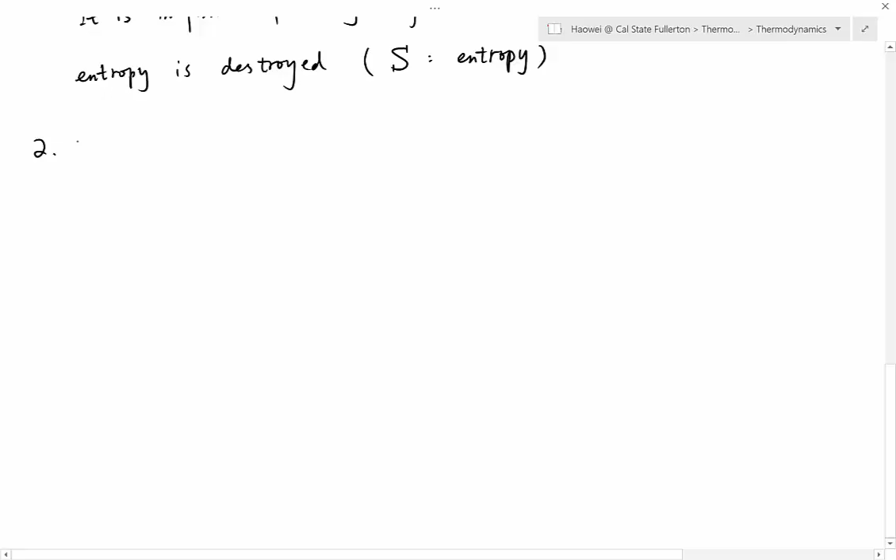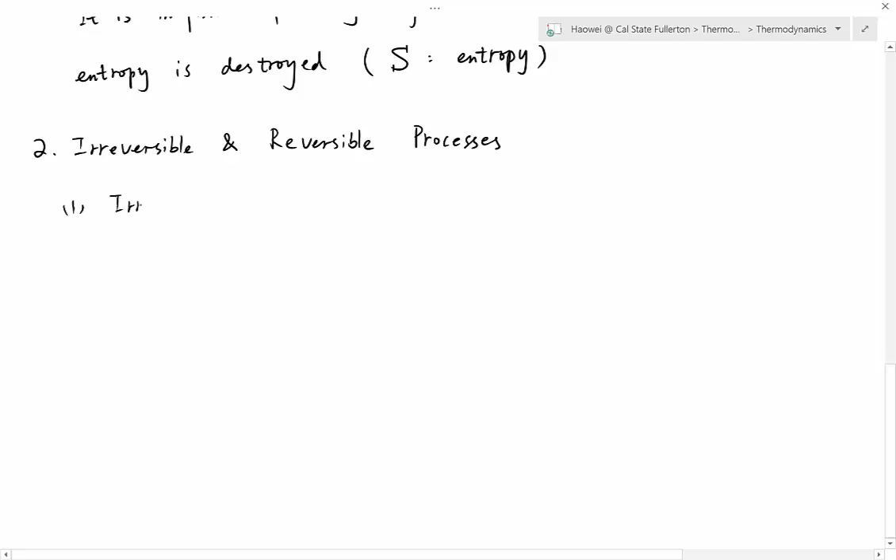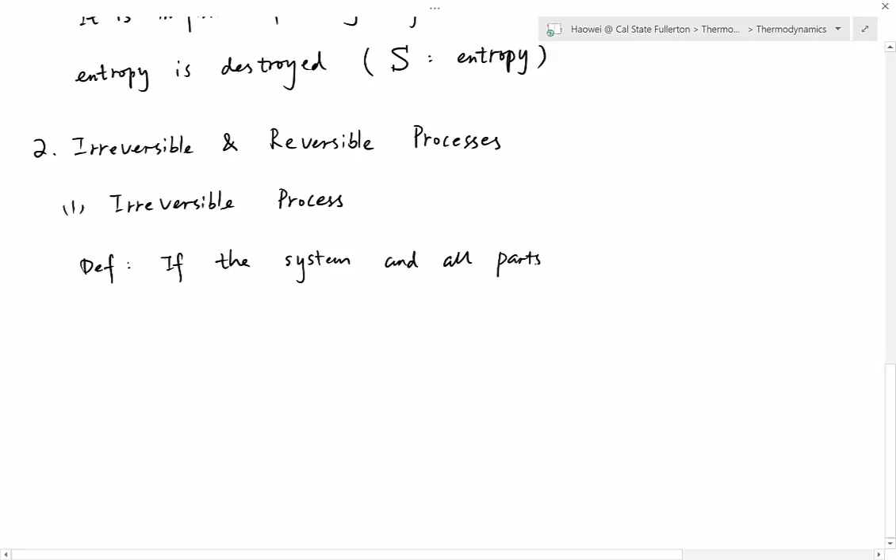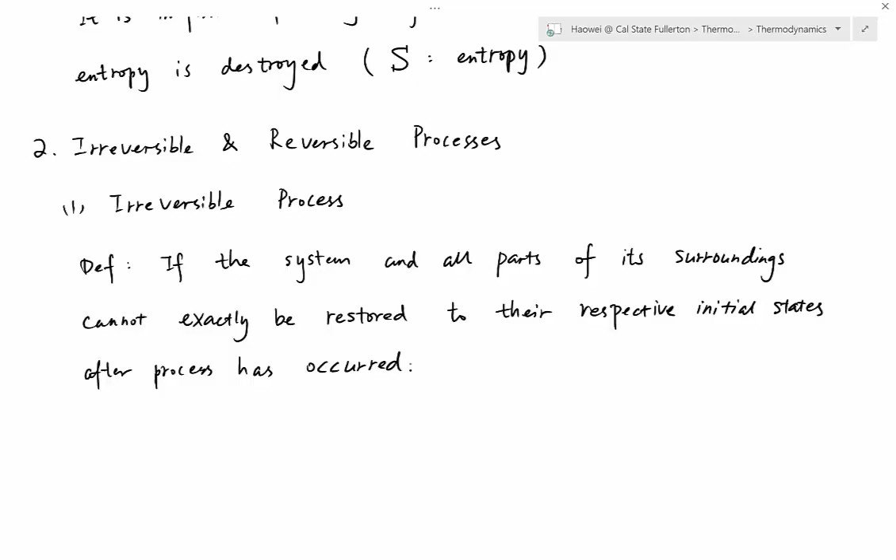Let's start from the irreversible processes. What is an irreversible process? The definition is: if the system and all parts of its surroundings cannot exactly be restored to their respective initial states after a process has occurred. If your system and the surroundings cannot go back to the initial state, then this process is called an irreversible process. We can think of a few examples.

First one, heat transfer. Heat transfer is irreversible. It's very straightforward. For example, you have a cup of hot coffee and you leave it on your desk. Over time, heat will be transferred from the hot coffee to the cold environment, and this process is not reversible. You cannot tell the air to give you back the heat and deliver it back to the hot coffee. So this process is not reversible. We call it an irreversible process.

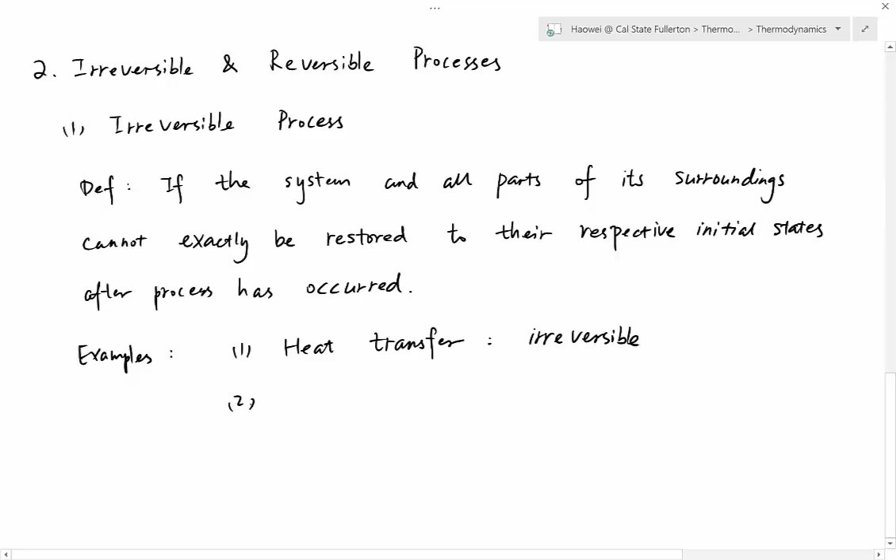The second example we can think of is friction. Friction is also irreversible. You can think of your car. You're driving on a freeway and then suddenly you have to brake. What is going to happen is the friction between the tire and the freeway will slow you down. So the kinetic energy becomes smaller and it will become heat in the tire. So your tire will become hot because of the friction, and now the energy is converted from kinetic energy to internal energy of the tire. This process is irreversible because you cannot ask a tire to cool down and give you back the energy so you can drive your car. It doesn't happen. So this process is also irreversible.

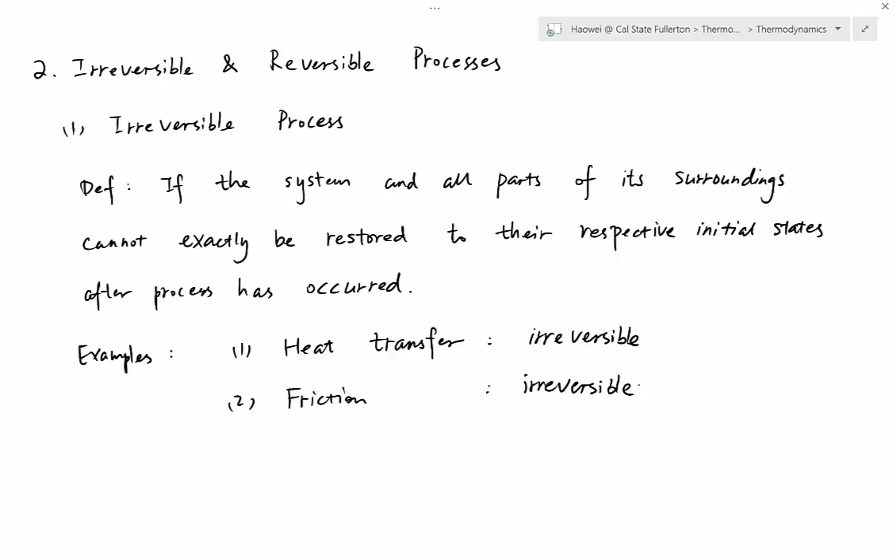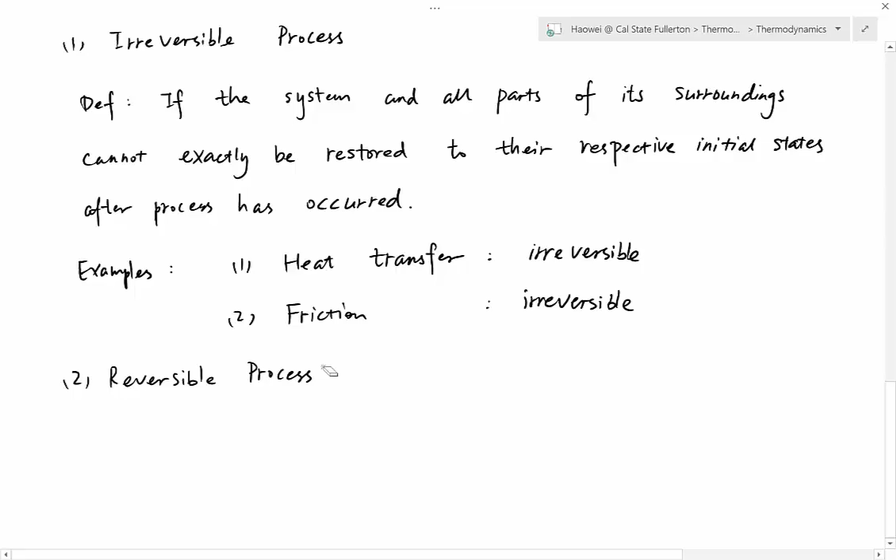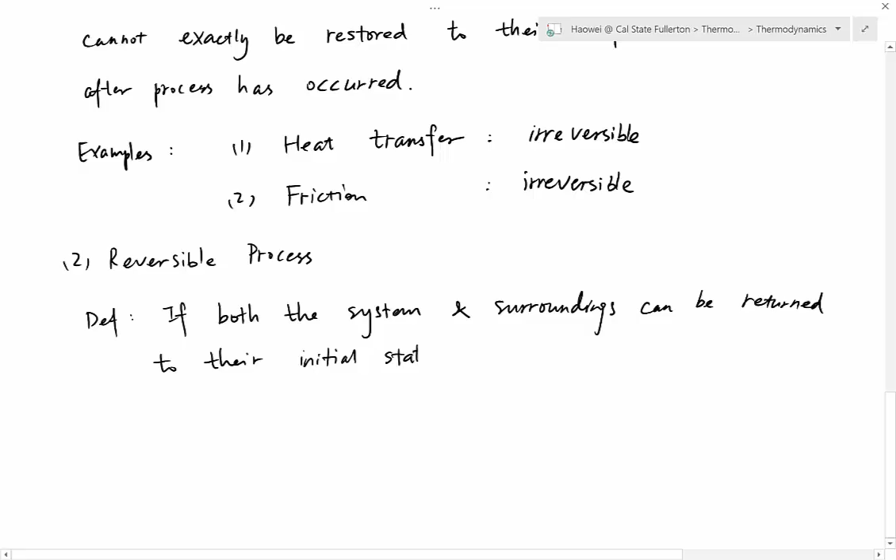Next, we talk about reversible processes. What is a reversible process? The definition is: if both the system and the surroundings can be returned to their initial states, then you can call this process reversible.

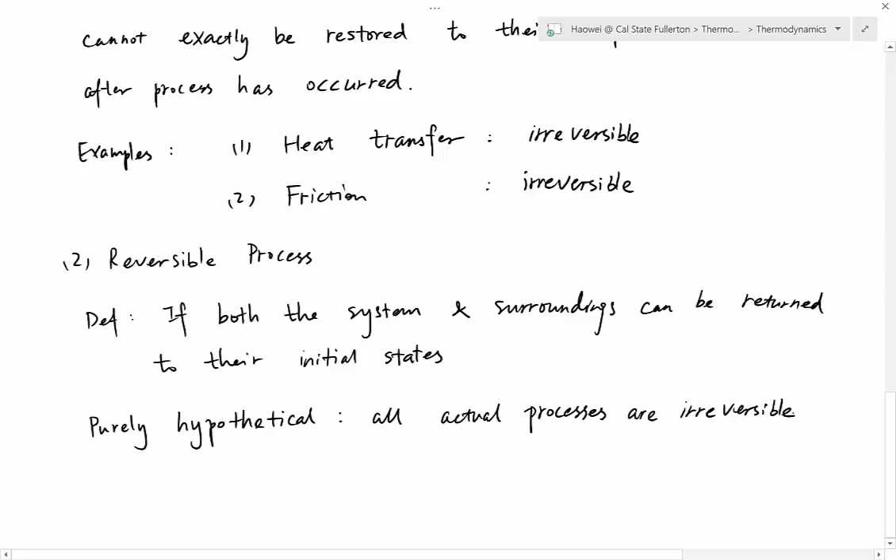It is purely hypothetical. All actual processes are irreversible. Everything in our life is irreversible, for example getting older. However, some of them can be approximately reversible.

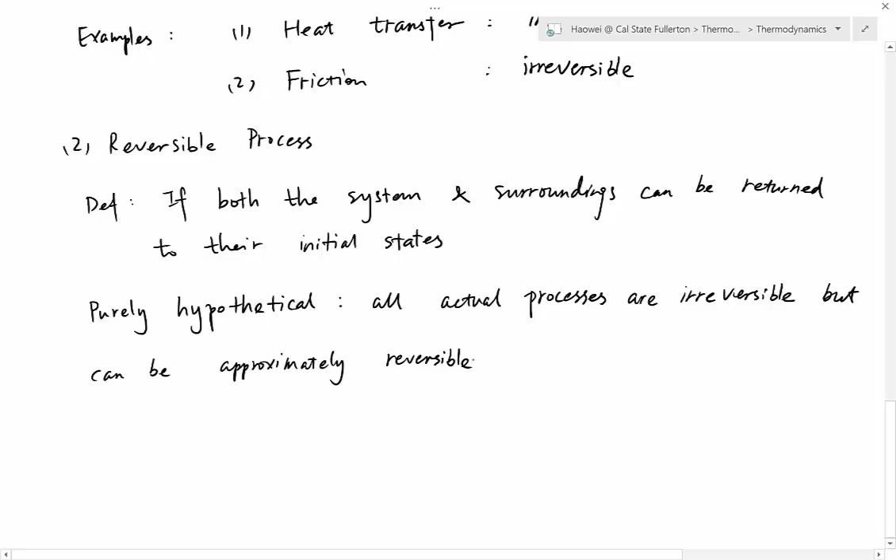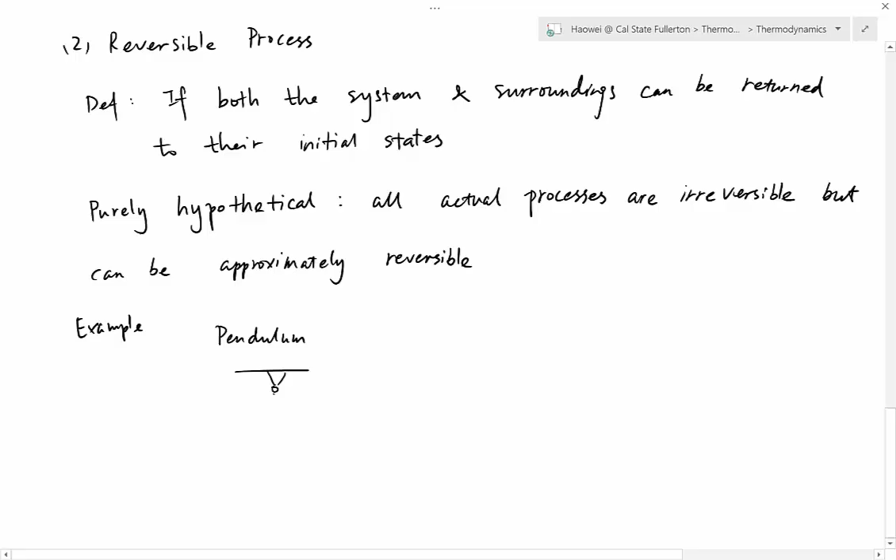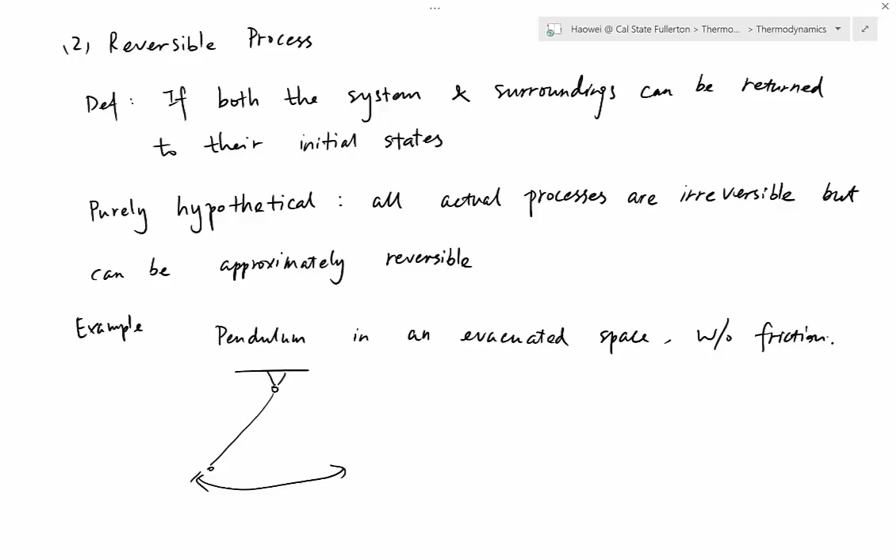Next, we can think of two examples for reversible processes. The first example is a pendulum going back and forth. If you put a pendulum in an evacuated space, meaning there's no air, so there's no friction, then the pendulum can go on forever and can always be returned to its initial state. This is an example of a reversible process, and we know in reality it will never happen because you will always have air, and air will cause friction. Friction is not reversible.

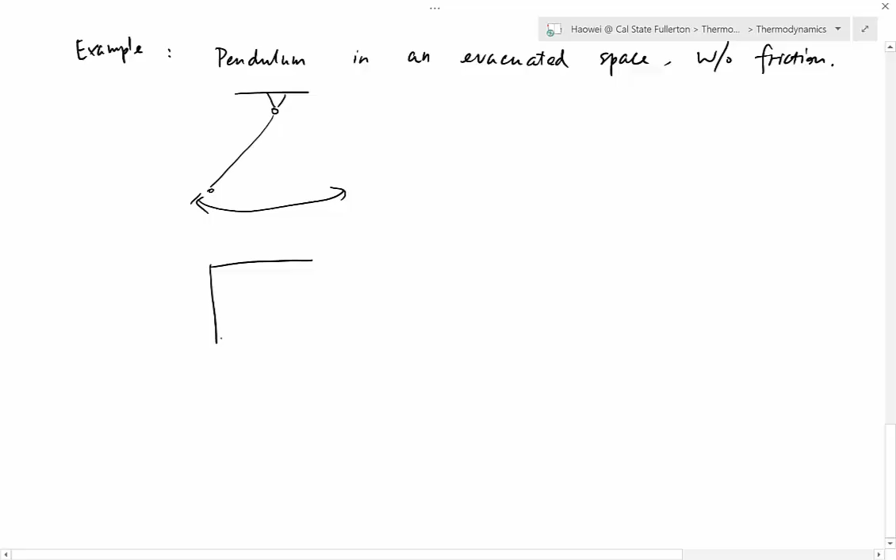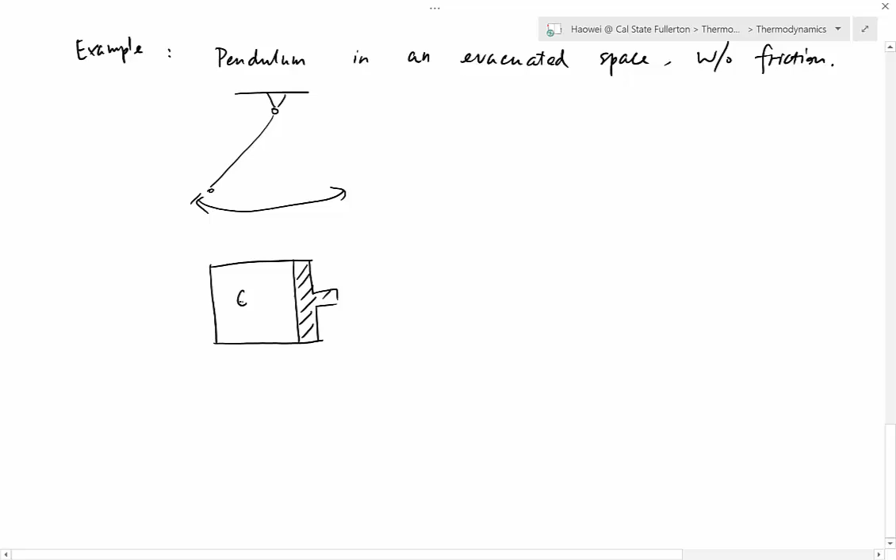Another example we can think of: you have a cylinder and a piston, like a simplified version of an engine. What's inside is the gas, what is outside is the atmosphere. If we slowly increase the pressure of the atmosphere, then the piston will be pushed to the left slowly. Then we decrease the pressure of the atmosphere again slowly, so the piston will be pushed to the right slowly, and it will be restored to the initial state.

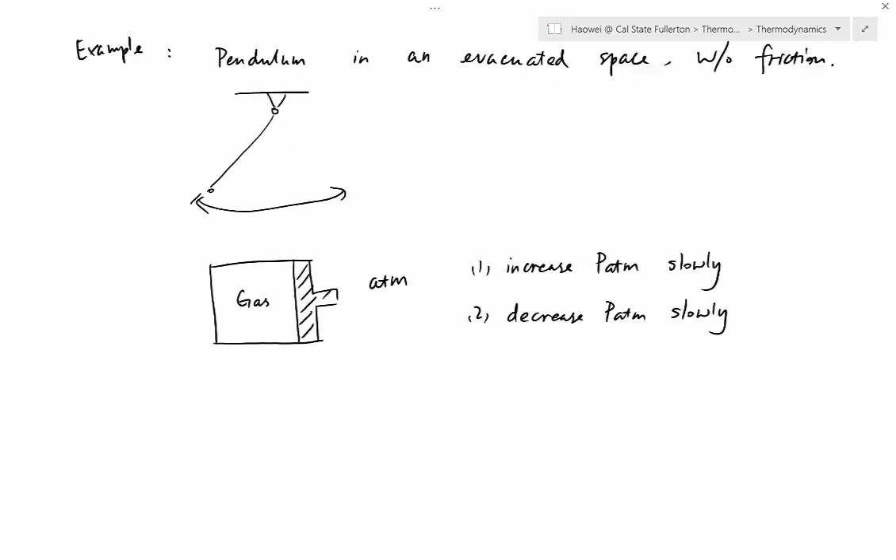Those are the two examples for reversible processes, and keep that in mind: it is purely hypothetical, but some of them can be approximately considered reversible. So now we go to the approximation.

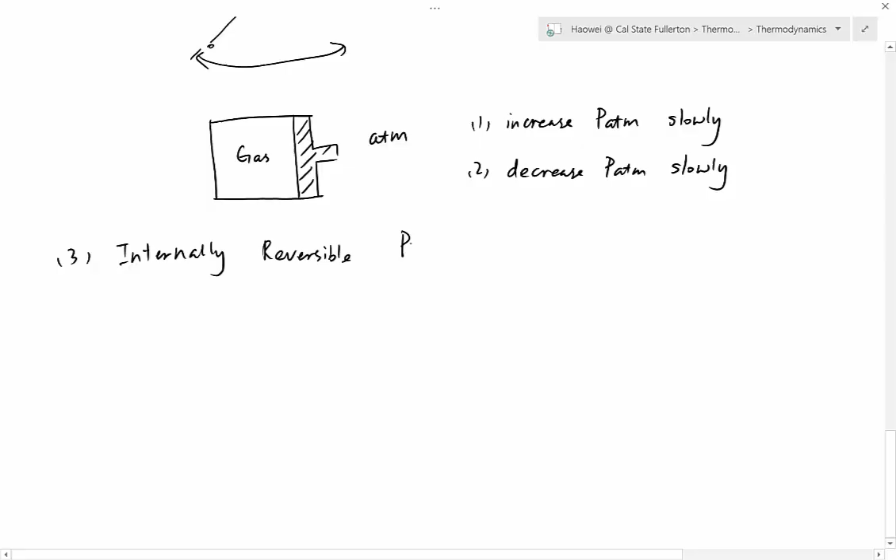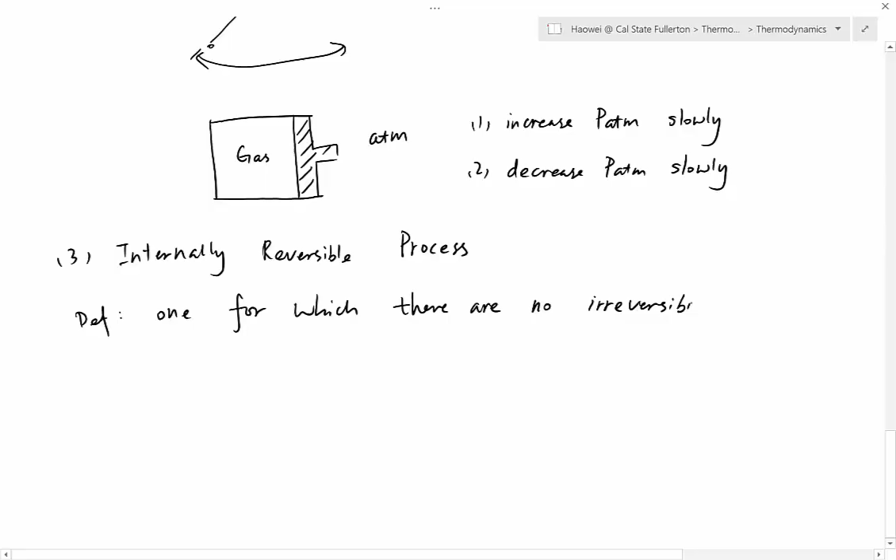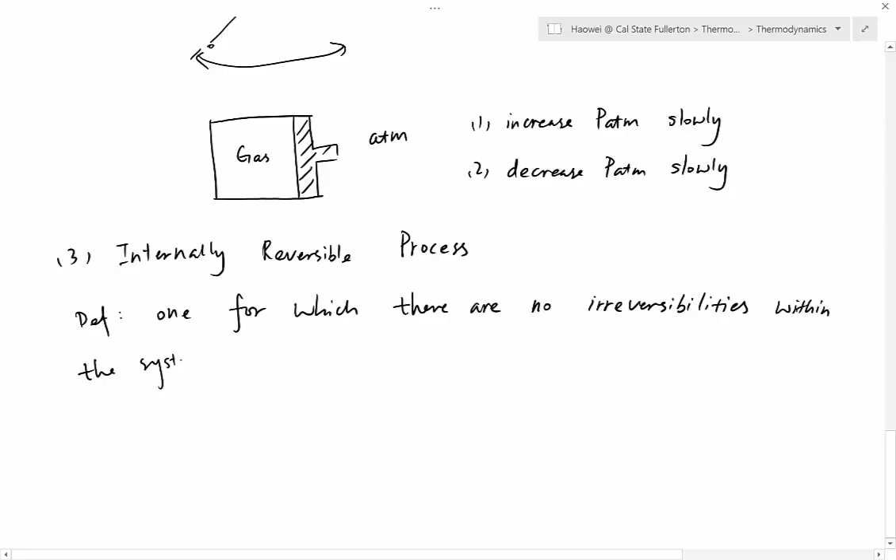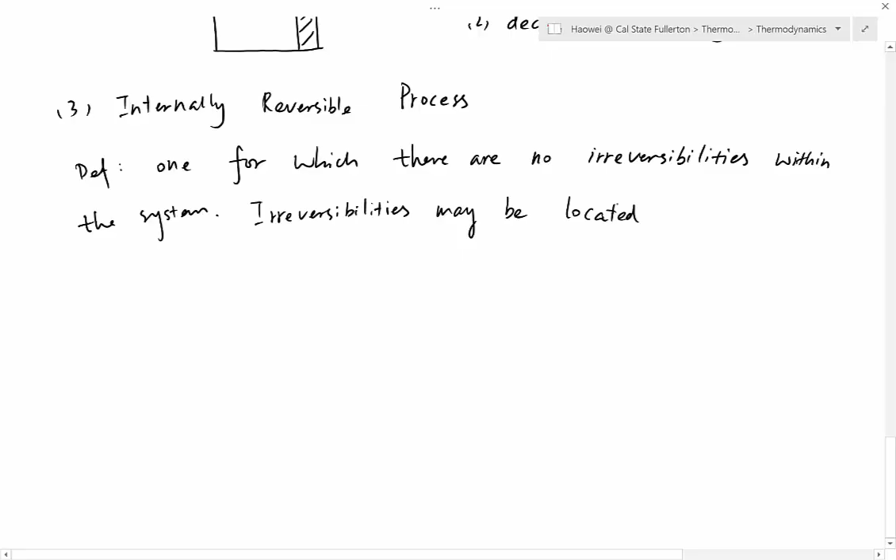What is approximation? It's called internally reversible. That's a compromise we take. What is the definition of an internally reversible process? The definition is one for which there are no irreversibilities within the system. Irreversibilities may be located within the surroundings.

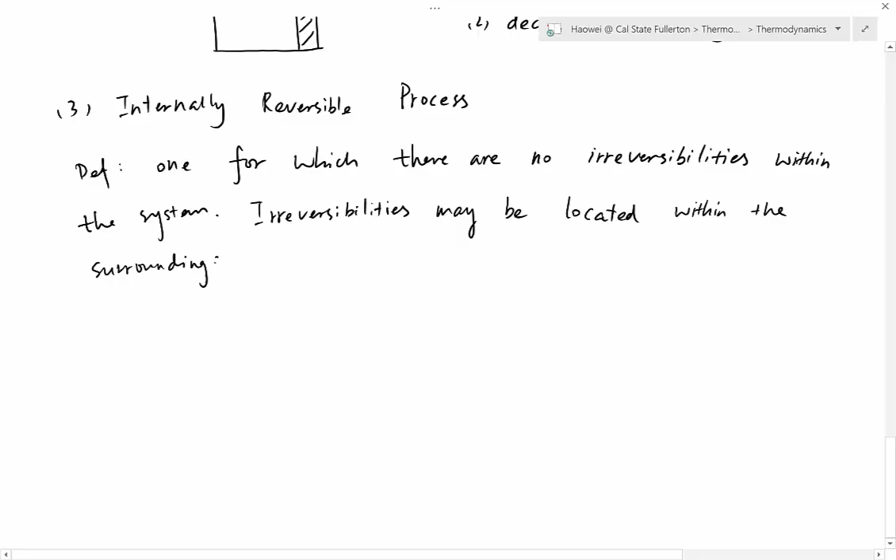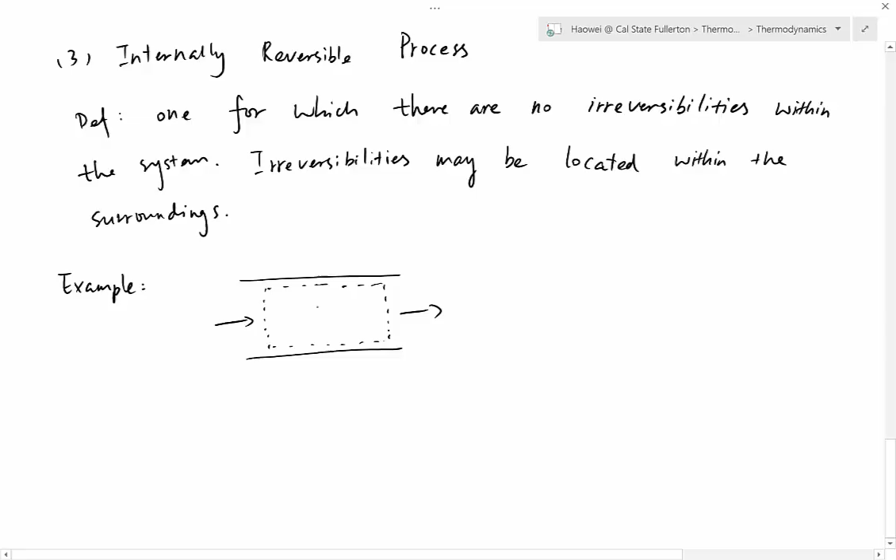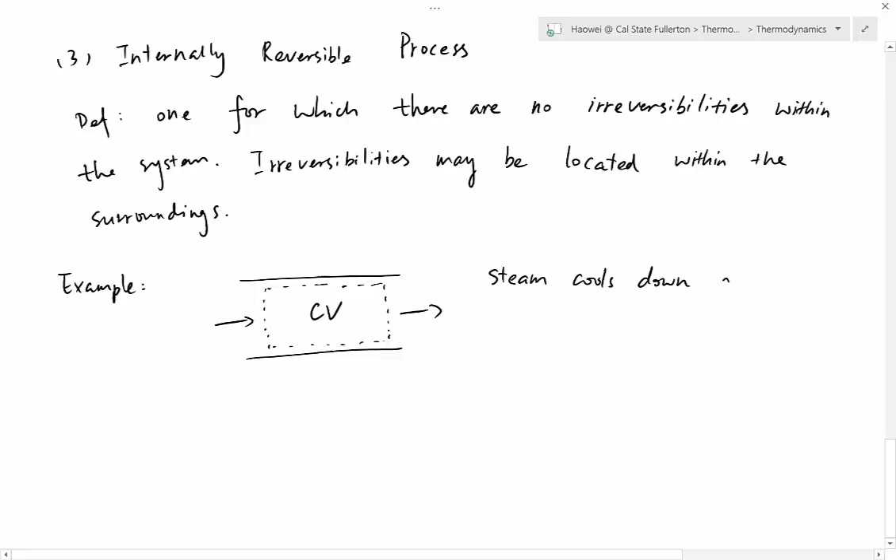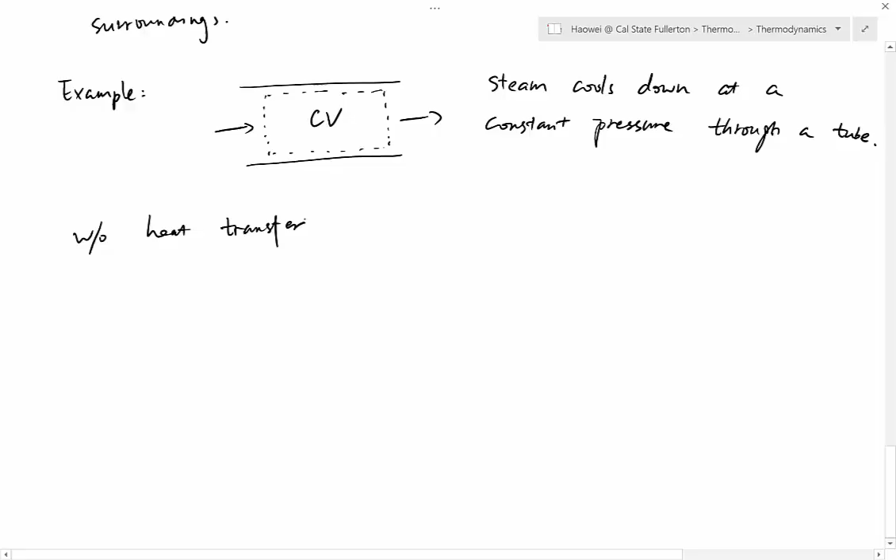Here, let's give you one example. So here we have a pipe, and what's flowing inside the pipe is hot steam. This is a control volume. The steam cools down at a constant pressure through a tube. It's flowing from left to the right. If we say we do not consider heat transfer, there's no heat transfer from the hot steam to the cold environment. If there's no heat transfer, there's no irreversibility, and then the whole thing must be reversible. We know in reality you will always have heat transfer; the hot steam has to lose some heat to the cold environment.

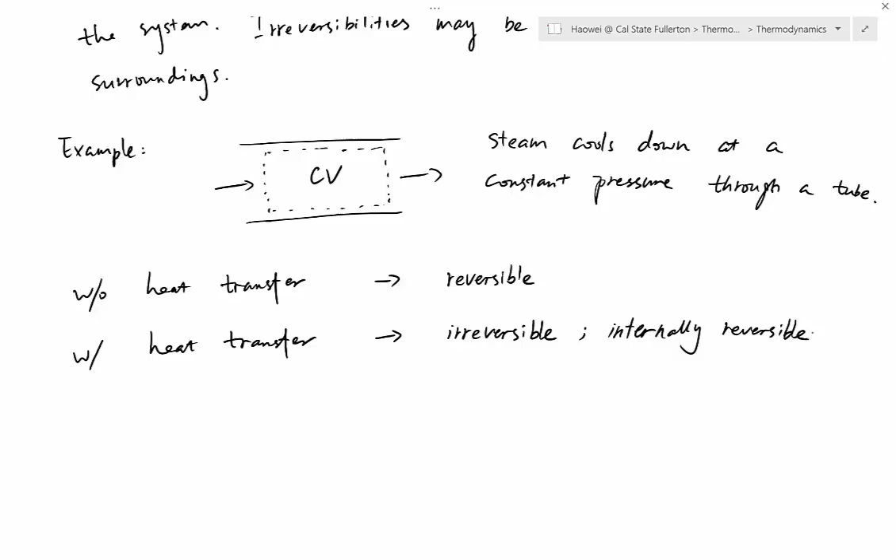So next case, what if you do have heat transfer? Then this process will be obviously irreversible because heat transfer is irreversible. However, the only irreversibility we have, which is heat transfer, happens on the boundary, on the dashed line. It doesn't happen within the control volume. If that's the case, we can call it internally reversible, because the irreversibilities only happen on the boundary. It doesn't happen within my control volume. That's why we can call it internally reversible.